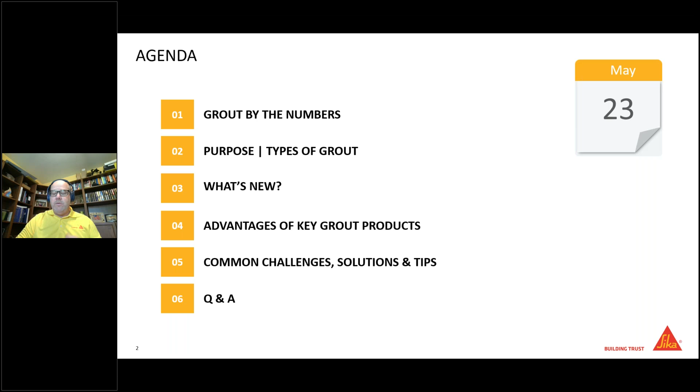So grout by numbers. Grout products represent approximately 20 to 25% of the core tile and stone installation market. So what we're trying to show here is the amount of grout that's being used, or how important grout is to the installation. And you're going to see that throughout this entire presentation, the importance of grout. We think of it as just a grout, but as a manufacturer, it's the only thing that we make that the end user sees. So we as manufacturers try to make it the best that we can.

Approximately 50 to 60% of the market size consists of standard, sanded, and unsanded cementitious grouts. We're starting to see a rise though in the high performance grouts, and high performance, ready to use grouts are going to be some key topics within today's presentation. We've got high performance grouts, the 118.7s, the 118.3, the epoxies, which we'll touch just a little bit on, and the 118.19 ready to use premix grouts, which we're really going to dive into because that's a new ANSI specification as of 2024.

Grout products drive architectural specifications and builder selections, typically due to color. How many times have we been sitting with somebody and they want this color grout, and if an architect specifies this particular color from a manufacturer, traditionally all the other products for that tile installation also go along with that manufacturer, not only for system warranties, but also because of ease of, hey, if it's going to be Sika tile grout, we're going to use Sika tile on all the rest of the project. So that architectural specification really does drive because of the color they're choosing.

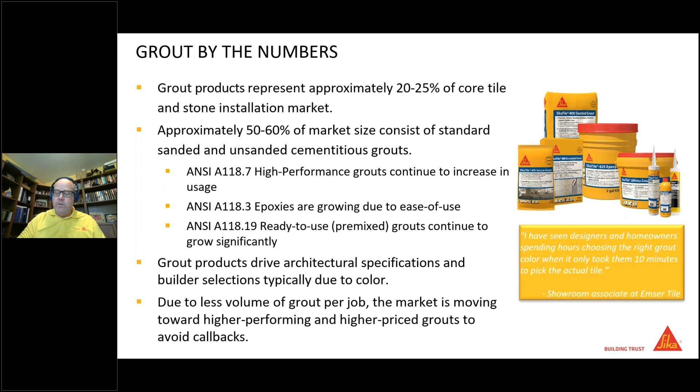So we're going to dive into that, but I do want to say here, if you see a picture of the products right below it, this is something that's so true. I've seen it myself. This is a quote from a personal friend of mine that works in a showroom: I've seen designers and homeowners spending hours choosing the right grout color when it only took them 10 minutes to pick the actual tile. Sometimes it's the reverse, but a lot of times they'll pick a tile pretty easily, but now it's down to choosing the appropriate grout or grout color they want for that installation. So let's move forward.

So the purpose of a grout. What is the true purpose of a grout other than just its appearance? It falls into the grout joint. Well, first and foremost, it is appearance. People are choosing a grout color or tile or grout finish to achieve a look. They're either choosing a contrasting color to really make that tile pop, or they're going with a complementary color to give it more of a monolithic finish and appearance. So the color of grout plays a big role in the appearance. The other one there is hygienic.

I don't think a lot of people think about this. Grout is hygienic in the sense that we've had instances where people want to take tile or a natural stone, because that's where we've seen it the most, and do no grout joints, just butt it up. Well, if you get particles, contaminants, food, any type of things into those joints, it's going to cause mold, mildew, some allergy and hygienic issues. So grout is not only for appearance, but also for hygienic purposes as well.

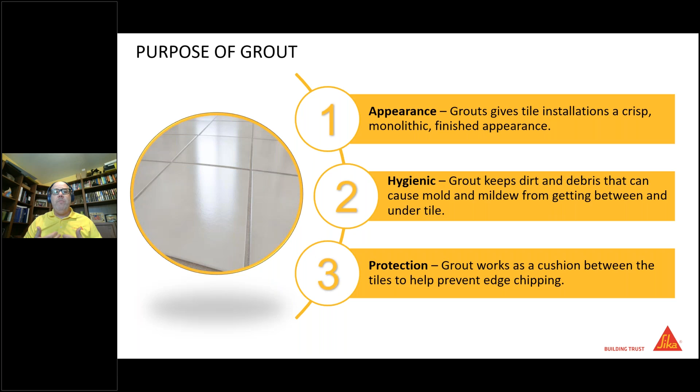And then of course we've got protection. Having a full grout joint protects the edges of those tiles, the cushion edge of that tile, during thermal expansion and contraction with tiles butting up against each other. If there's no grout or low grout in that joint, things hit the edge of that tile and chip it where the glaze meets the bisque. So there's three things: appearance, hygienic, and protection. A lot of people don't realize the second and third, but grout serves a bigger purpose than just appearance.

Other than tile and stone itself, grout is the most visible part of the installation. As I said a few minutes ago, as a manufacturer, it's the only thing we make that the end user sees. Everything else is under the installation. So when we're talking about grouts, we're talking about key performance characteristics. What are we looking for? We're looking for color consistency. Nobody wants a shaded, blotchy job, a light brown in one area, dark brown in another, and medium brown in another, because it's all the same grout but it's not consistent.

Hardness and durability. We want that grout to last the lifetime of the tile, and it can be done, but it also takes some things we're going to be talking about later in this presentation. What can that hardness and durability achieve? What does it do for us? And then there's stain resistance. What does everybody complain about? I love my tile, but my grout looks blah. So we want to look at grouts that are stain resistant. Those are some of the key performance characteristics.

And of course, no efflorescence. We don't want efflorescence. In certain parts of the states, efflorescence is more common than in others, or in certain types of installations over mud beds.

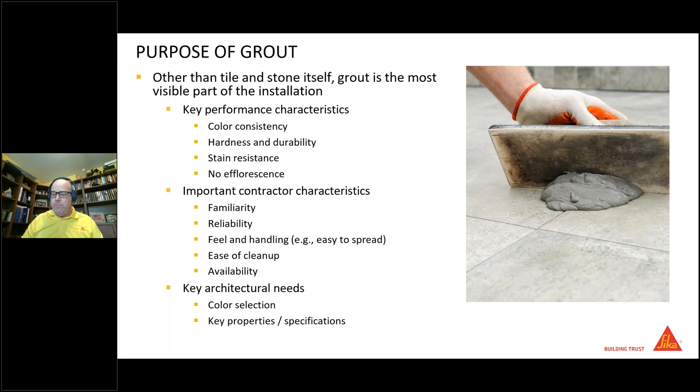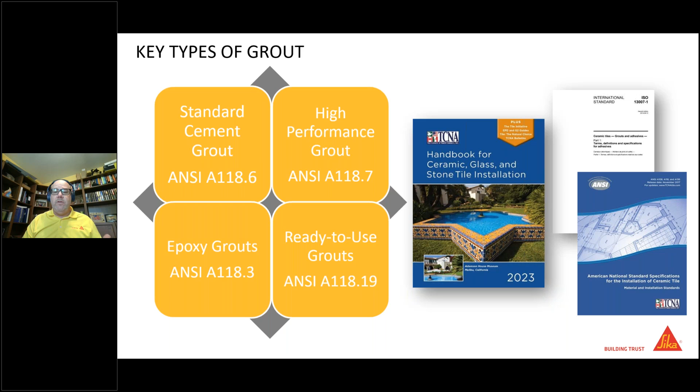Now let's talk about the key types of grout. The key types of grout typically out there are standard cement grouts, high performance grouts, epoxy grouts, and ready to use grouts. A lot of these ANSI designations are defined in the TCNA handbook or in the American National Standard specification for installation of ceramic tile. In a lot of these ANSI specifications, you can really dig into and look at the testing standards, but we're going to talk about these individually here.

So when we talk about key types of grout, first and foremost, the one that's the most used, the one that's out there every day, is 118.6 standard cement grouts. I'm not going to read that first bullet point, but basically it's telling us that it's a manufacturer prepared product. It tells you a little bit about the ingredients in it, and it produces a water resistant, dense, uniformly colored material. But foremost, these are the more economic grouts that are out there.

These are typically your sanded and unsanded grouts. The sanded grouts are for 1/8 inch to 1/2 inch joints, and the unsanded grouts are for 1/16 inch to 1/8 inch grout joints. What is the big difference between the two? I always tell people it's in the name. One has sand, an aggregate, and one does not. That aggregate's purpose is to fill a larger void, to keep something from possibly shrinking, which we're going to talk about in a little bit. But 1/16 inch to 1/8 inch unsanded, 1/8 inch to 1/2 inch sanded.

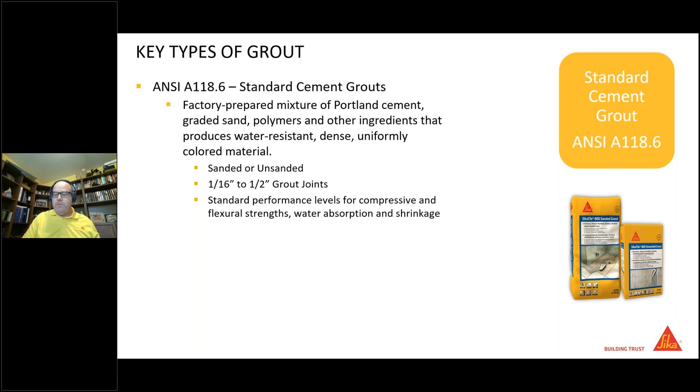These are standard performance levels for compressive and flexural strengths, water absorption, and shrinkage. I want you to remember those words, standard performance, because we're about to jump up to 118.7, high performance, not standard. This is where we're seeing the industry start moving towards these high performance grouts. It's a factory prepared mixture that is polymer modified and cement based. It produces a hard, dense joint that resists shrinking, cracking, and wear. It's a finer sand to combine usage of sanded and unsanded grouts, so in the same product, you're able to do 1/16 inch to 1/2 inch grout joints.

This is the scary part. People see where it says faster setting. When we say faster setting, that's really done with a lot of the raw materials that are in it. It's a faster setting product, but still not so fast that you can't get on it and clean it. We as manufacturers, for example with the 815 Secure Grout, make this product so that it is faster setting, but it is still easy to clean up. So faster setting means we can get on the job quicker.

We can get into the cleanup phase of it quicker without having to hurt that grout by getting on it too soon. Then, of course, these products typically resist efflorescence, and that's typically due to the raw materials in this product. So they're going to resist that efflorescence on top, which we'll talk about and how to avoid it here in just a little bit.

These are high performance levels for compressive and flexural strengths, water absorption, and shrinkage. In a little bit, I'm going to show you a slide, a chart, kind of what the ANSI designation of this product is trying to tell us it needs to achieve to be considered the high performance 118.7 grout.

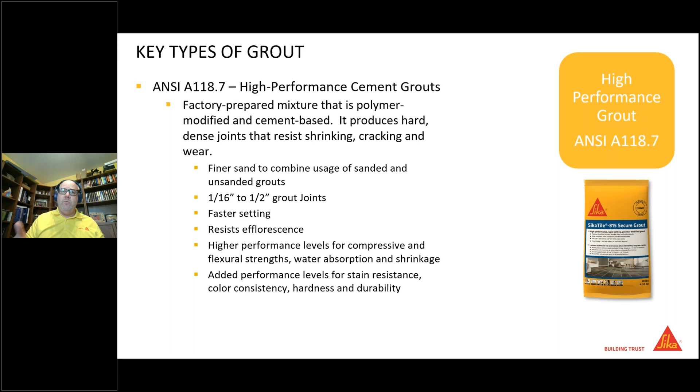So another type of grout, and these key types of grouts, is epoxy grouts, 118.3. We won't dive into these too much. They're epoxy grouts. People hear the words epoxy and they get scared. A 118 epoxy grout is a full 100% solids epoxy grout. Typically, it consists of a resin, a hardener, and a filler. That filler is typically going to be a sand or a quartz or some type of color.

That's typically the color for these applications, but they're chemical resistant, and that's where you're seeing these typically used in chemical resistant areas, areas where they need to have a grout that's not going to deteriorate over time because of the cleaners or the contaminants getting down on that floor. For example, restaurant kitchens. These grouts can typically do up to a 1/2 inch grout joint, so it's a product that can do that 1/16 up to 1/2 inch grout joint. They're high performance level for stain resistance because of that chemical resistance part of these, the color consistency, the hardness, and durability.

Now, I know when I started in the industry back in the late 80s, epoxy grouts were some of the most difficult things to use. I recommend, if you haven't tried an epoxy grout lately, try one. They're so much easier to use. We built surfactants into our product, so that way it just makes it easier to clean. Surfactant's a fancy word for soap. So it just makes it easier to clean, easier to use. They're not as caustic as they used to be, but they're still giving that great performance that they're known for.

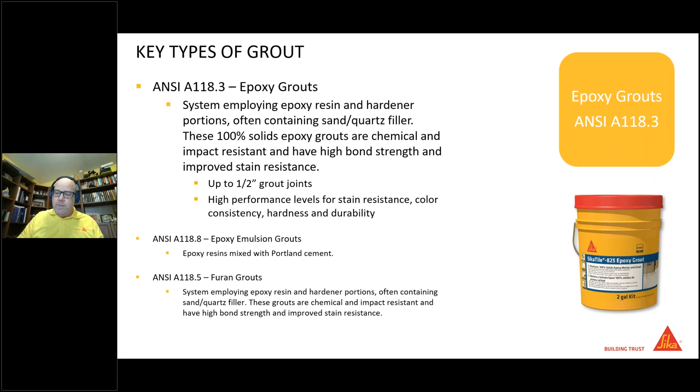So that's epoxies. Now, key types of grouts: ANSI 118.19, organic premix grouts. This is a new designation. We're going to talk about that here in just a few minutes a little bit more, but this is our ready-to-use grouts. I am going to read this word for word: a ready-to-use factory-prepared mixture of water, polymers, aggregates, pigments, and other materials to produce a water-resistant, stain-resistant, and uniformly colored material.

So what it's telling us, in a sense, is this is a bucket of material that's ready to go. It's factory-prepared. Open the lid and use it and go. So what this has here, these particular products, they're finer sand to work as both sanded and unsanded. So again, this product can go from that 1/16 inch up to 1/2 inch grout joint. They're water-based, higher performance levels for stain resistance.

These products don't need to be sealed. They're ready to go. Once it's dry, cured, never have to seal that product again. Color consistent, hardness, and durable. We're going to talk about those with the ANSI specification in a moment. Premix, ready to use right out of the bucket, and reusable. I'm going to hit the reusable point because I think it's a pretty cool concept.

For example, our Ultima grout here. You pop the lid off, you're going to see a little clear piece of plastic. Take the plastic out. Use the grout. Let's say you're doing a shower backsplash. You're not able to complete it. It's the end of the day. You need to come back the next day or the next day after that or up to 30 days.

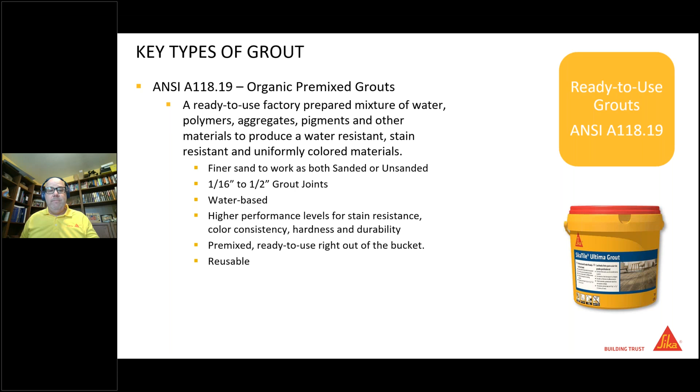You can take that little piece of plastic that we took out and saved, put it back inside, put the lid on top of it, make sure it's secured, stored in an area where the temperature is not rising up and down, and you can reuse that grout for up to 30 days. Now, that's pretty cool in my opinion, that I don't have to mix anything. It's really easy to use. We're going to dive into that here in just a moment.

So what's new in the world of grout. This new ANSI 118.19 is a new designation as of 2024. So with that being said, even though the ANSI requirements are new, although ready-to-use grouts have been around for several years, we now have an ANSI test method to classify and measure the products.

So these products have really changed over the years, and these ready-to-use grouts are growing every day. They're no longer DIY products. They're professional grade products that can be used in residential and some light commercial applications. I know of a certain fast food restaurant that uses ready-to-use grout, these premix grouts, in their dining area because they can withstand that light commercial application.

So they're great products, much easier to use than the original urethane based. So they went from urethane based ready to uses to the newer acrylic bases. The urethanes, if you ever used those, they were hard to smear. You kind of had to be a Popeye there to get it into the joints. They left a haze. They were just a lot more difficult. They still gave a lot of the attributes that we're looking for, but they were just more difficult to use. The acrylic-based products are much easier to use in the application, and the attributes just keep growing and growing.

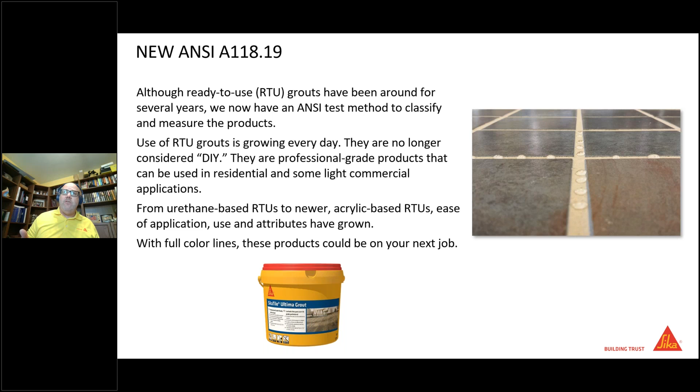So with a full color line, these products can be on your next job. You're going to start seeing more ready-to-use grouts out there that can tackle these everyday installations and just make life easier. And again, we want to avoid callbacks. We want to avoid going back out to that job. So with this ANSI designation of the 118.19, here's kind of what we're looking at. I'm not going to hit everything on the testing here, but indentation resistance.

So indentation resistance, that is 1,000 PSI or greater. So basically what that's meaning is that point load or that high heel hitting and creating indentation in that grout. It's not so soft. It's hard enough to resist that up to 1,000 PSI. Abrasion resistance, that's 500 or less cubic millimeters. Abrasion resistance with that cleaning, with the everyday wear, making sure that the product's not going to wear out of the grout joints.

Resistance to mold growth is a 0. Water cleanability, it's got to be able to be cleaned with water, free of visible haze, lumps, or dry materials. And then chemical resistance, no deterioration and indentation resistance of greater than 500 PSI. So there's a chemical resistance to it. That's why it doesn't need to be sealed. But again, these products are great because in this one type of product, you're going to be going from a 1/16 inch up to a 1/2 inch in most cases. They're color controlled.

With our particular product, the Ultima Grout, the color is actually in the quartz. It's not a pigmented product, so you can't mess the product up. You can't pull the color out of the product as you're cleaning it. They're pre-mixed and ready to use.

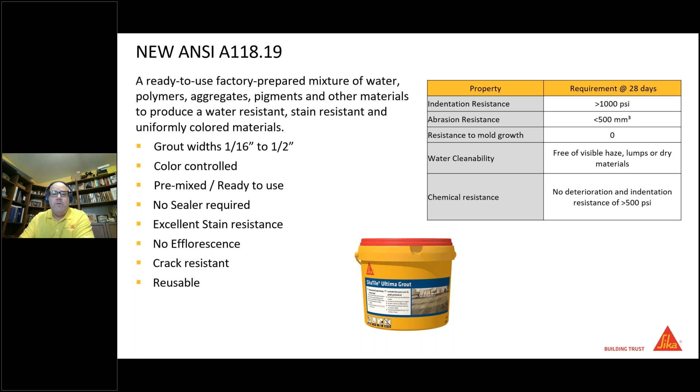So advantages of key grout products. Let's talk about some advantages. ANSI 118.7 high performance - we're going to go through these bullet points and talk about the advantage of these products. High performance grouts are not new, but continually evolving and growing in usage. You're starting to see more and more usage, which we'll talk about here in a couple bullet points.

Grouts are traditionally chosen by color, to either match the tile being installed or to make a statement. That's that first selection - I pick this tile, I want this color grout. Well, one of the things that's being overlooked is the performance of that grout. If we go back to that commercial kitchen or dining restaurant kitchen where they pick a color grout, not only is the color going to look great, but we've got to have a grout that's going to withstand the abuse it's going to get in that application.

I use this example too - I live just outside of Chicago, and in the winter we salt the living fire out of our sidewalks and streets. I've walked onto many jobs, hotels downtown in the city, where that salt gets dragged into the front entryway, and that salt we're using to keep from slipping is destroying our grout. So color is important, but it's also the performance, the characteristics of what that grout can withstand.

These are higher performance grouts. They're ANSI 118.7. They can reduce grout headaches by eliminating callbacks - that's what we want to do, we want to eliminate the callbacks.

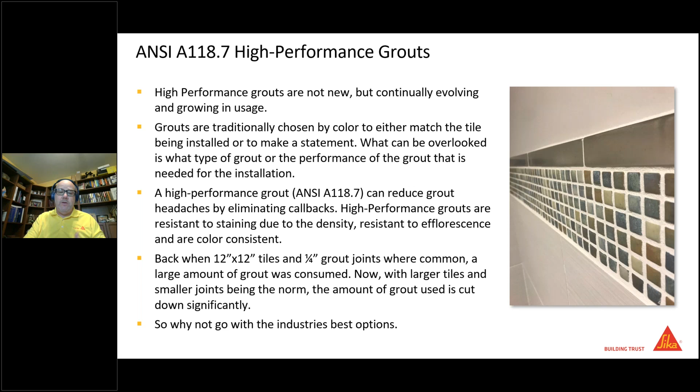So why not go with the industry's best options? Those are going to be the higher performance grouts. We really want to see that, not only as a manufacturer but as end users - the better grout being used on these jobs and applications to help reduce callbacks.

So when we look at high performance grouts, there's the ANSI 118.7 designation. What does this tell us? If we look at this graph, we'll skip linear shrinkage, but what I really want you to see is water absorption. The test duration and conditions are 50% relative humidity to immersion. This grout has to have less than 5% absorption in the sanded or unsanded version. There's still some absorption there, but with a higher performance, denser product, it's down to less than 5%. Those 118.6 grouts are going to have higher absorption.

Compressive strength - this is a really impressive number. Compressive strength after 28 days needs to meet 3,000 PSI minimum. That's a pretty darn durable grout right there. That's how we help resist staining, keep color consistency, and resist efflorescence. Tensile strength, 500 PSI minimum. Flexural strength, 1,000 PSI minimum. So as you can see, this testing for this product is a hard test to pass to meet this high performance grout standard.

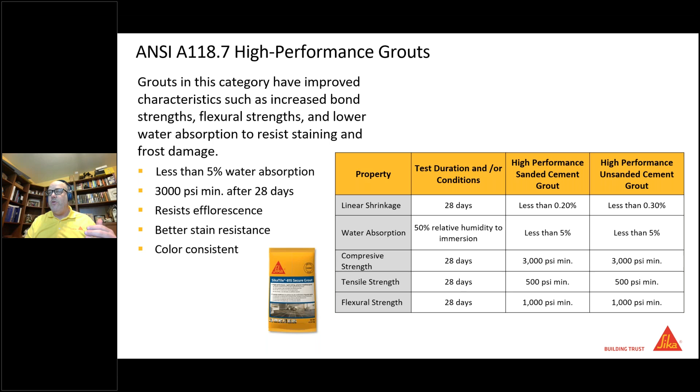And when you can meet that, and you know you've got this information and quantification behind the product to get to that 118.7 high performance designation, you're getting a good grout from these manufacturers. So with that being said, 118.7 grout, you're going to spend a little bit more money for it. But as I talked about with tile size, grout joint size, and amount used, you're seeing less grout used on the job. So the net is actually going to be equal to or better.

So, common challenges, solutions, and tips. This is where we get into a lot of these - these are all pictures that show what we've seen out on the jobs or when we're walking around. I'll say this, my entire family is in the tile business, and we walk with our heads down having really interesting conversations picking apart jobs we see out there, trying to figure out why something happened. That's hopefully what we're going to talk about right now.

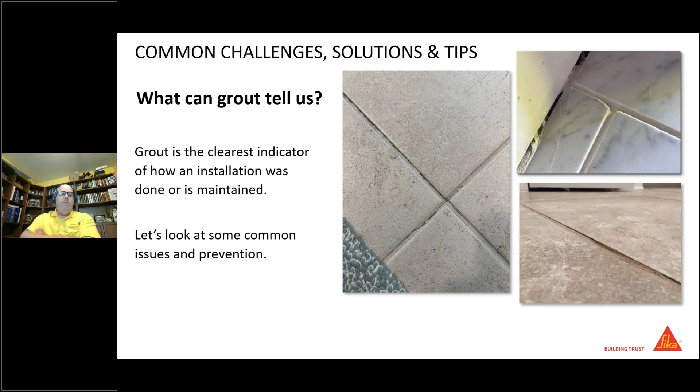Grout is the clearest indicator of how an installation was done or maintained. Grout can be a sign of loose tiles, overwashing, underwatering or overwatering, cleaning methods, all kinds of things. So let's look at some common issues and prevention - cracked grout, we've got some pictures here. We'll hit on those in just a moment, but cracked grout is probably what we see the majority of the time when we're out walking around, and what your customers might see if something goes wrong - cracked grout joints that run parallel to the tile or across the joint from edge to edge.

So those are the typical two types of grouts. I can tell you when you've got a grout that cracks from edge to edge, so it's between the tiles, kind of going from one tile to the other, that's typically a shrinkage grout. And that typically means that your grout was mixed too wet, you got on it too soon, added too much water in your cleanup, or you used the wrong grout.

So you maybe used an unsanded grout in a 3/16 inch grout joint, and that grout is not made to withstand that width of a grout joint, so it shrank. Hence, the sanded grout would have been the proper choice for that. But if we go through the bullet points here and look at it for prevention, how do we keep these grouts from cracking?

So first and foremost, make sure tiles are well bonded and proper expansion joints are used according to EJ 171. That's probably one of the biggest ones that we see out there. We see people that hard grout the installations in, not following perimeter soft joints, or the soft joints that carry through the tile installation. Not only do we get cracked grout joints, we get cracked tile, but we need to follow those in accordance to that.

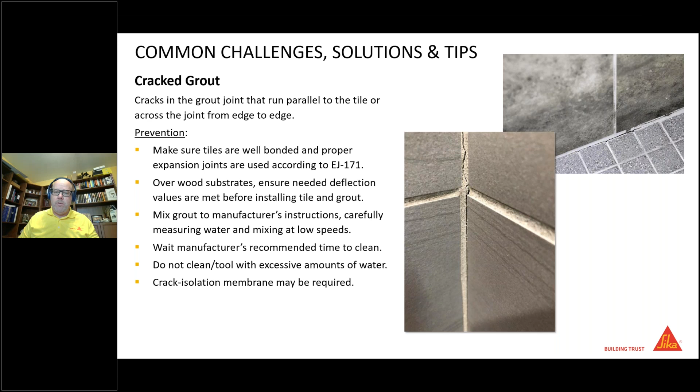And in some cases, a crack isolation membrane may be required. So that cracked grout joint may be because there's a crack in the substrate that's telegraphing through right there at that cracked joint. So these are some key things to look at for prevention of cracked grout joints. So let's move to the next.

First and foremost, one of those ways to prevent that, it's not in my bullet points, is you can move towards that 118.7 or that ready-to-use grout or the epoxy grouts. These grouts are known to hold that color consistency. But for prevention, pack grout joints fully. We want to make sure that grout joint is as full as it can possibly be. There's no hollow spots or voids underneath it.

How do we know when we're grouting if we've got a full grout joint? It's not like you can see through the grout. There's a real easy indication. When you take your grout float and you're smearing it across that grout joint, pushing the material down into the joint, it's actually going to speed bump on you. That's what I call it. You'll see this little hump up of the grout because it can't go any further, so it actually pushes back up when you come over with the float. That's one way to tell that you've got a full joint.

Another thing in here for prevention is allow 2/3 of the tile thickness to be open for grout, meaning that I don't want a bunch of thin set or mortar or other stuff inside my grout joint before I go grout. We as manufacturers try to make our grouts dry evenly, dry at a consistent rate.

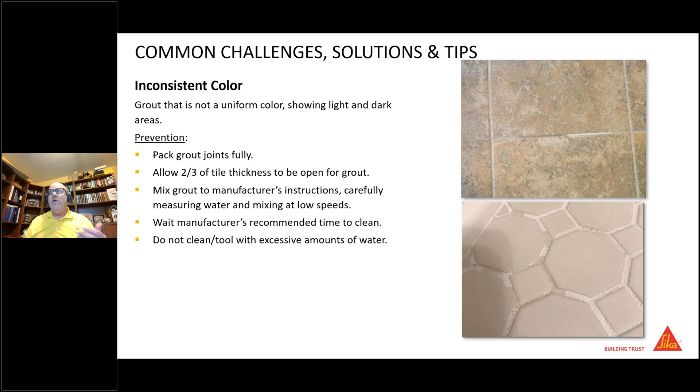Then do not clean tool with excessive amounts of water. So that's again coming back up there as a repeat. We don't want to add additional water to these products when it doesn't need to be used. So inconsistent color. Let's move to the next one, efflorescence. Certain markets in the United States, this can be a big deal. Certain areas, maybe not so big of a deal, but it is still something out there that we do see.

And that efflorescence is a whitish powder or crusty crystalline deposit on the joint or along the edge of the tile, mainly seen on exterior applications or over mortar beds. Now, I put in the over mortar beds simply because efflorescence, we're used to seeing it outside on brick installations, on the brick veneer of a job. We do see it in some shower instances. Most of the time when we do see it in a shower, it's over a mud bed.

I've got pictures and results of where a pebble stone was installed over a mud bed in a shower and nothing was cured out. It's constantly wet. The grout they used was a standard grout, which resists some efflorescence, but it can only resist so much, so you were getting this white film on all the grout joints in certain areas of that shower. So it's not only exterior applications, but it also can be over mortar beds or floats, mud beds, whatever term you want to use.

So how do we prevent this? We want to allow mortar beds to properly cure before grouting. So if we mud a bed or float a bed or a mortar bed, we want it to cure before we start grouting, because a lot of times let's say we've got a 3-inch down to 1-inch mortar bed, or even if it's just a flat 3-inch thick mortar bed, it dries enough for us to walk on it. We install our tile on top of it.

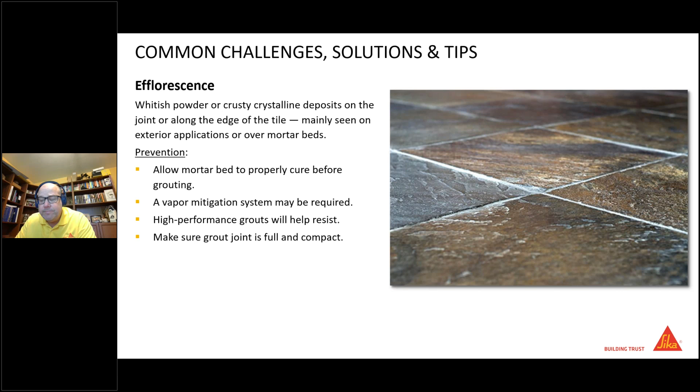I wouldn't recommend licking it or touching it and putting it to your tongue. It's not going to dissolve in water, but basically what this is, it's the acrylics or the latexes that are in the products that are leaching through. And a lot of times this is caused because there's too much latex, and let's talk about these preventions. So allow mortar and grout to completely cure before submersing.

That's a big one. When you're doing pool applications, fountain applications, where there's tile or a waterfall type of installation from, let's say, a sauna going down into a pool, they'll install the tile, they want to put the water on it and have that water running through it. What's going to happen is it's not curing out properly. That water is going to get behind it and start pushing the latex that's in the installation out to the surface, causing this unsightly rubbery white stuff.

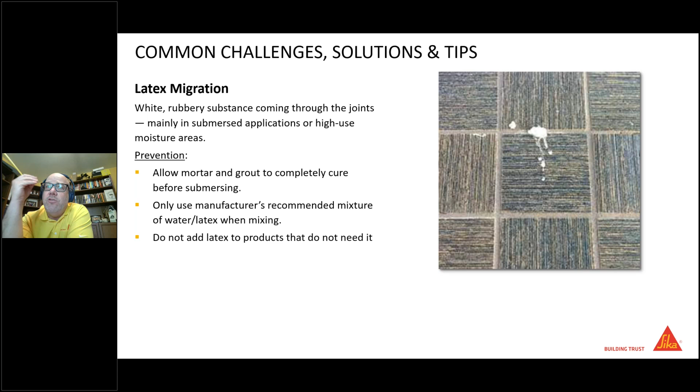So we need to make sure, again, whatever's on top of it, our mortars, our grouts are completely cured. In most cases, that's 28 days prior to submersion. Only use manufacturer recommended mixture of water and latex when mixing. You don't want to add additional latex to products that don't need it. For example, with your mortars, most mortars out there are modified mortars. If you start adding latex to them, you're going to flatten the cake, as I say.

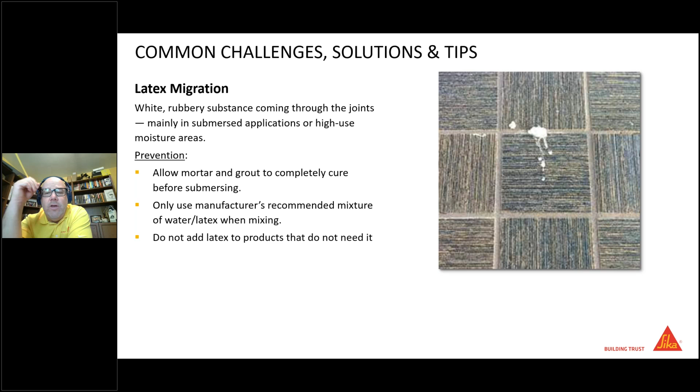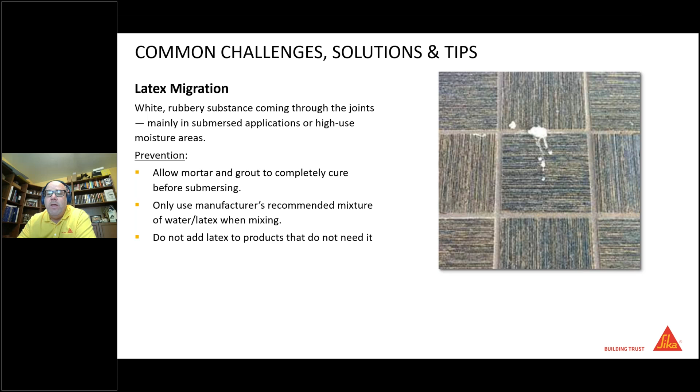If a cake calls for 3 eggs and you decide to add 4 eggs, that cake's not going to taste the same or even look the same. You're adding things that don't need to be there. What ends up happening is that excessive latex will leach out to the surface, causing those unsightly white blemishes. So that's latex migration. Again, we see it not as often as efflorescence. Sometimes the two are mixed up, but it is still a thing that's out in the industry that we do see.

So low joints. Low joints are not completely full or sit below the tile edge. If you look at these two pictures here, we've got the picture of what I call a micro bevel or a little beveled edge, and that grout sitting well below even that bevel part. And then if you look at the stone that's on the top, you can really see that it's low.

Now, I talked earlier about grouts being hygienic. If I've got low grout joints, even though I've got grout in it, and I go to sweep, debris, food, other things are getting caught inside those grout joints, they're going to cause allergy problems or hygienic problems. So again, a low grout joint is actually a bad thing. In the TCNA handbook, it actually specifies where grout joints should sit with certain types of edges or profiles on tiles. So how do we prevent this?

Make sure joints are packed full at time of grouting. We want to make sure we're getting that speed bump and we're not washing too much out. We want to use the appropriate grout float. There's different types of grout floats. There's the gum rubbers, the urethane floats, the hard rubber floats. We just want to make sure we're using the right float for the right tile application or grout application.

Want to mix the grout to manufacturer's instructions, carefully measuring water and mixing at low speeds. If we overwater that grout, as it dries and cures, it's going to shrink, and now we're going to have a low grout joint. So we want to make sure we are following those instructions.

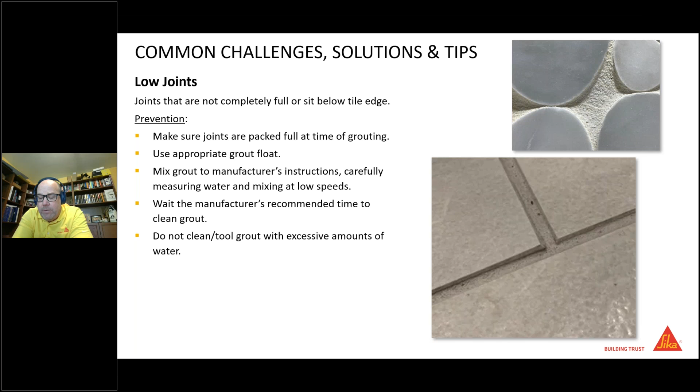Pinholes. We see this every once in a while. It's still something that's out there. Pinholes are tiny holes that appear in grout joints when grout is fully cured.

So, prevention. How do you prevent pinholes from happening? One thing I've seen a lot of cases is people take their sponge to tool and clean the grout joint aggressively, doing the wax on, wax off extremely fast, agitating that grout. We want to do nice, slow cleaning, circular motions when tooling and cleaning those grouts.

Prevention also means do not use high-speed mixers, because we don't want to create air entrapment inside that grout prior to using it. When you mix it, get air entrapment in the bucket, put it out on the floor, and smear it in, some of those air pockets are going to be below. They're going to pop, or as it starts to cure and shrink, you're going to end up with pinholes like you see in the picture.

We want to make sure grout joints are fully packed. Mix to the grout manufacturer's instructions, carefully measuring water - I'm always going to say that. Always measure water with grouts, mix at low speeds, and wait the manufacturer's recommended time to clean the grout. Don't get on it too soon. And do not clean or tool grout with excessive amounts of water. Use a dry, wet sponge with as little water as possible to clean these joints.

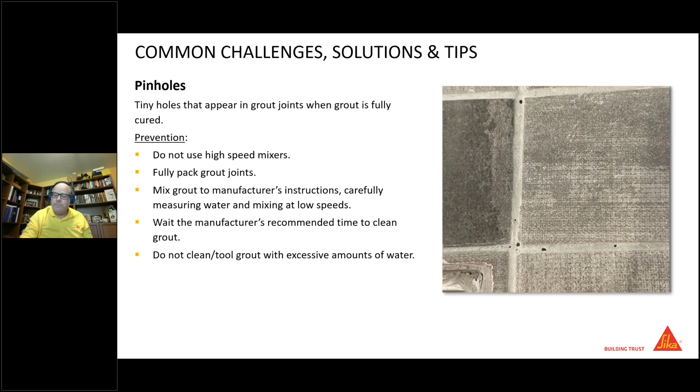So, grouting tips. I've got just a couple here that we're going to go through. For hot weather grouting, we tend to run into this more and more these days, especially for guys in the southern states - Arizona, California, Texas. Hot weather grouting can be difficult, but these tips can help with having a successful installation.

Store grout away from direct sun and away from the heat. Don't keep it in your van sitting out in 107-degree weather in Phoenix, or leave it in the back of your pickup truck absorbing the sun's heat. If you take that hot bag and put it in cold or room temperature water, it's going to flash on you and go off too quick - you'll be lucky if you get it out of the bucket. So store it away from direct sunlight, preferably in a shaded or air-conditioned area.

We want to use cold water when mixing. We've done tests where you can take your water - a gallon or whatever amount - put it in an ice bucket to cool it down if you're in a super hot area. Using that cold water will extend your pot life, your workability, as well as how long it takes before you need to clean up.

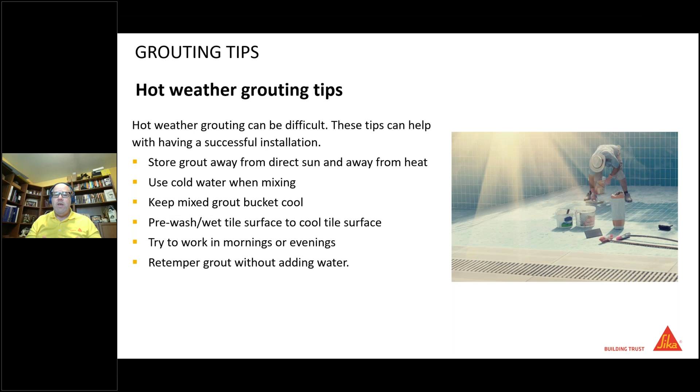I've used them some myself over the last couple of years, and it really makes a difference in that hot weather application. So efflorescence mitigation systems. How do you avoid efflorescence? What's a way to do that? With efflorescence mitigation we're looking at keeping the efflorescence from moving through that entire system all the way up through the grout joints, leaving efflorescence on top. So how do we do that?

We can use membranes such as an uncoupling mat, which is going to actually reduce or prevent efflorescence from transferring through the mortar up through the grout joints. Liquid applied membranes can do that. Drainage mats and moisture mitigation systems. So those are ways to prevent that moisture from carrying through that installation if you've got a high RH or a moisture slab from pushing all that alkali, high pH products through.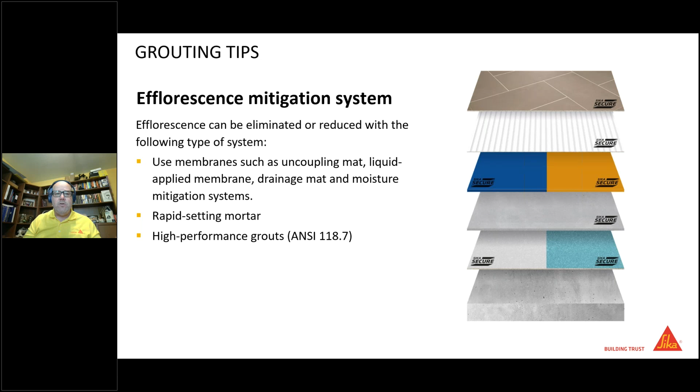Rapid setting mortars can do that as well. So if you've got those fountains or submerged areas, or areas with high RH or high moisture levels, a rapid setting mortar can do that. Also, as the last bullet point, you can see the high performance grouts, the ANSI 118.7 grouts. They help resist efflorescence. In some cases they're not going to stop it, but they're going to help resist it to where it's very minimal. So again, these are some tips on efflorescence mitigation.

So solutions for success. That's what we want. We want success. We're looking for solutions. Hopefully that's why we're here today. What are these solutions for success? Always follow manufacturer's instructions. It's so important, because everybody's grouts perform a little differently. We talked earlier about familiarity with grouts. They are grouts, but they do perform a little differently, some faster, some slower. We want to follow those instructions not only for mixing, but also for cleaning.

We want to dry mix the grout. As manufacturers we always recommend mixing the entire bag of grout if it is a cementitious product. There's a reason for that. I always use Kellogg's Frosted Flakes as an example. When you get to the bottom, what's there? All the good stuff, the sugary sweetness of that cereal. Well, if you take a grout from manufacturing, lay it on its side, and it goes across the country, forklifts, back of a truck to a job site, the contractor tears the top off, pours in half of it, mixes it up. What's he missing? All the good stuff in the bottom of the cereal box.

So we want to make sure that we dry mix these. If you are going to use a partial bag, at the very least roll the bag around end over end, side over side, to remix those pigments and get all those different size pigments mixed well. Measure water for mixing. We've mentioned it again and again. Measure, measure, measure. I can't say it enough. Mix the entire bag of grout, we just spoke about that. Use cool to cold water for mixing. It extends our working time with this product.

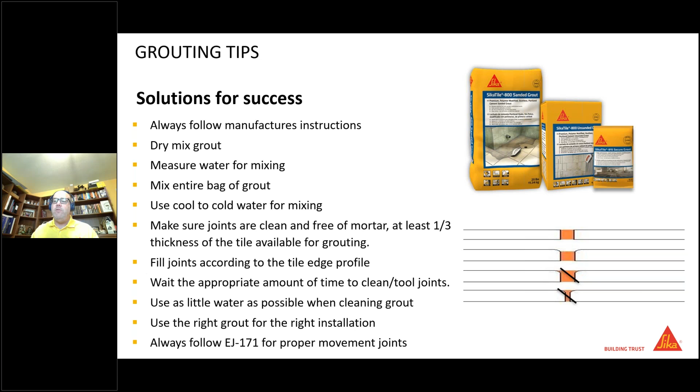Then of course, as always, follow EJ 171 for proper movement joints. That is extremely important. They're in the handbook for a reason, and we touch on them so much because of their importance—perimeter soft joints, expansion joints, saw cuts, all of those telegraphing through your installation. We want to make sure we're honoring those so we have success and don't get callbacks.

So with that being said, my final thoughts. Who knew that something so unassuming as grout could be such a nemesis? If you go into every grout job with the know-how and the right choice in grout, you can eliminate an enormous number of issues. With proper surface preparation, installation techniques, and proper maintenance, your grout will not crack under pressure, will stay in place, will not pop with excitement, turn white with fear, or crumble with joy.

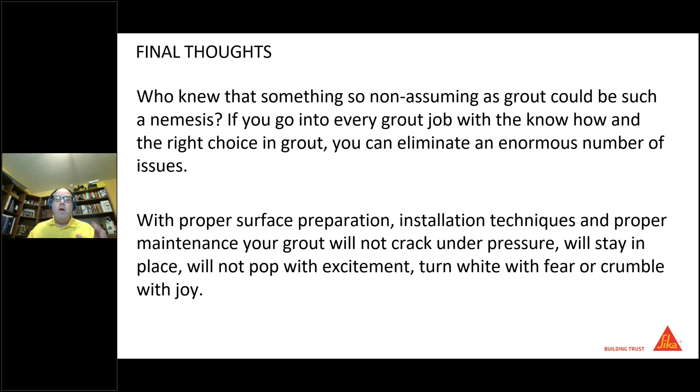Brett, let me thank you. It's amazing—some of the simplest things in our industry for tile contractors are troweling and grouting, and they probably just need simple changes in their approach to make it an easier, better situation.

Great job. I want to say, you mentioned manufacturer's recommendations many times, and I want to say this to everyone: manufacturer's recommendations are the recommendations you follow. We all preach methods and standards of our industry, but the final say is the manufacturer's recommendations because they're standing behind it. Read the directions on the back of the bag, bucket, or can—those are really the directions on doing it right and making it simple for yourself.